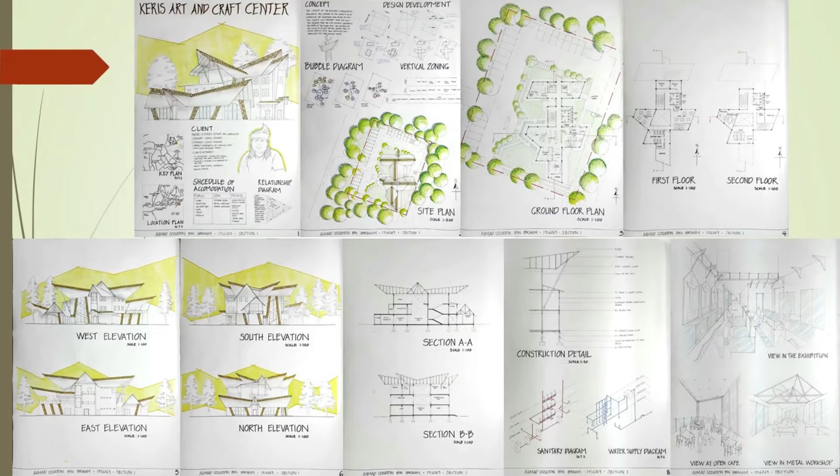In this video, I will present my design of an Art and Craft Center that was proposed specifically for Keris production. Let's start the presentation with a summary of the proposed site and the client for this project.

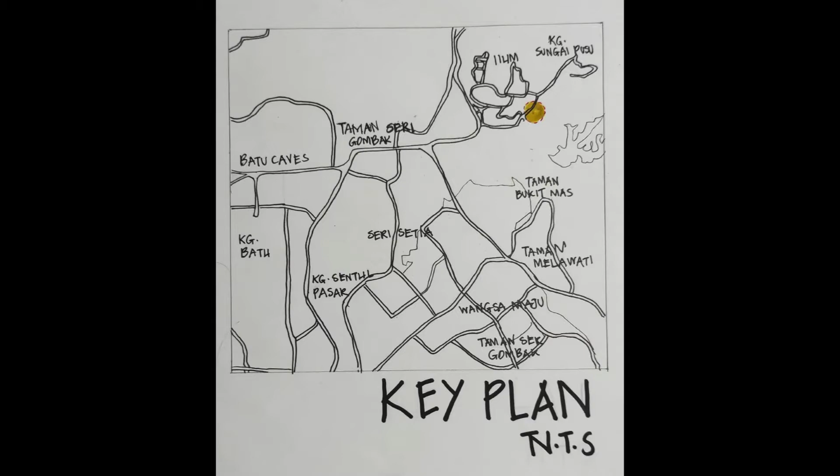My site is Site A, located near Mahallah Bilal, IIUM Gombak, Selangor. This is the key plan and location plan showing the location of the proposed site.

The client's name is Muhammad Izrin Izwan bin Kamaluddin, who works as an artisan specialized in making traditional Malay weapons such as keris, kerambit and golok. He currently works under a company named Keris Empire, based at Kampung Kota Lama, Kuala Kangsar, Perak.

Some of the synthesis obtained from the client: he wants two convenient and separate workshops, which are a timber workshop and a metal workshop, for producing the keris. He also wants 6 workers to be able to work at the workshop at one time.

He is also interested in Malay traditional elements in the building and the application of passive design, such as natural ventilation and lighting, especially in the workshop areas. He also loves to have modern technology to increase productivity, but he still wants traditional tools as he is used to the traditional way.

Next we move to the schedule of accommodation that was concluded from the brief precedent study, case study, and client synthesis. Generally, the spaces were divided into 3 parts: public, semi, and private.

In the public space, the areas included are the lobby, exhibition hall, souvenir shop, cafe, toilet, and musolla.

Meanwhile, the semi-public space includes the seminar room, metal workshop, and timber workshop. The semi-public space is open to public visitors, but they need some kind of permission to access it.

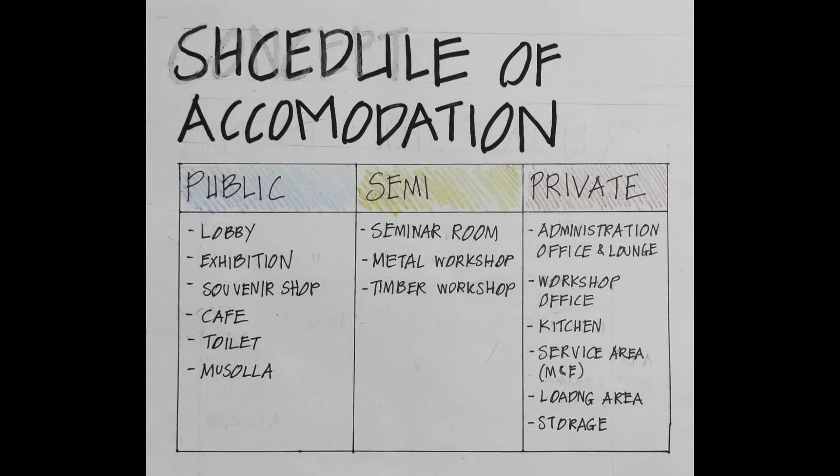Next we go to the concept of my building. As we know, keris is one of the most famous traditional Malay weapons for its sharpness and deadly strike. So as a way to represent and symbolize the sharpness and power of the keris, the concept of angularity is chosen to design the building. The angularity is also derived and influenced by the context of the site.

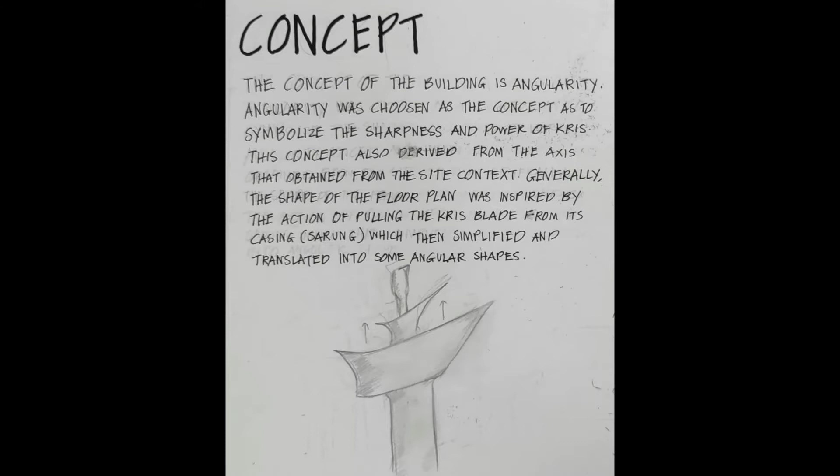Generally, the building floor plan symbolizes and represents the action of pulling the keris from its sarung, by translating and simplifying it into a combination of geometrical and angular shapes.

The design starts by making the view axis that connects all views from the site, which are the view of Mahallah Bilal at the west, and the view of the green and calm forest at the north, east, and south of the site. The second stage is making the wind axis that mainly comes from the north and west of the site.

The third stage is combining these two axes, which creates an angular axis that functions as the main grid line for designing and shaping the building.

The public, semi, and private spaces are positioned on the axis based on privacy level. The public space is located near the entrance to the site, while the semi and private spaces are located a bit farther from the entrance to give a sense of privacy.

The fourth stage is making simple rectangular shapes to represent these three main spaces. The public space is separated from the semi and private spaces.

Next, I play with the addition of shapes to indicate the entrance and maximize the view and wind amount into the building. The sixth stage is adjusting the shape to follow the angular grid lines in order to maximize wind amount into the building, especially at the north part, and also to maximize the view from inside the building directly towards the greeneries outside.

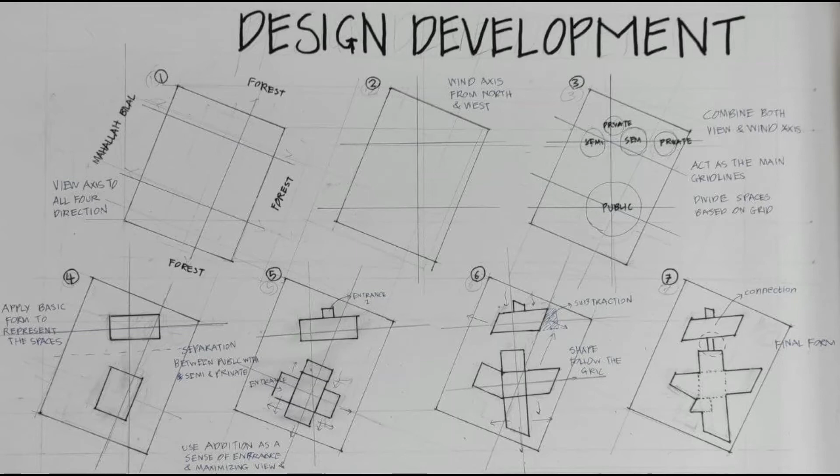Finally, an angular shape was obtained by following the angular side axis, and we can see that the plan assimilates and symbolizes the shape of a keris being pulled from its sarung.

After getting the overall shape, I started to organize the space within it. This is the bubble diagram for the ground floor. The blue circle indicates public space, yellow is semi-public space, and red is private space. The public space on the ground floor consists of the lobby, main exhibition area, special exhibition, souvenir shop, cafe and toilet, arranged close to each other.

Meanwhile, the semi-public spaces are the timber workshop and metal workshop, located at the north part of the site. This is to utilize and maximize the wind that mainly comes from the north as well as the west of the site. Another reason the workshops are separated and located a bit far from the public space is to give a sense of privacy to the workers, as well as to minimize the loud noise from the workshop being heard in the public space.

For the private space on the ground floor, it consists of exhibition storage, metal storage, timber storage, workshop office, service room and the loading area outside the building.

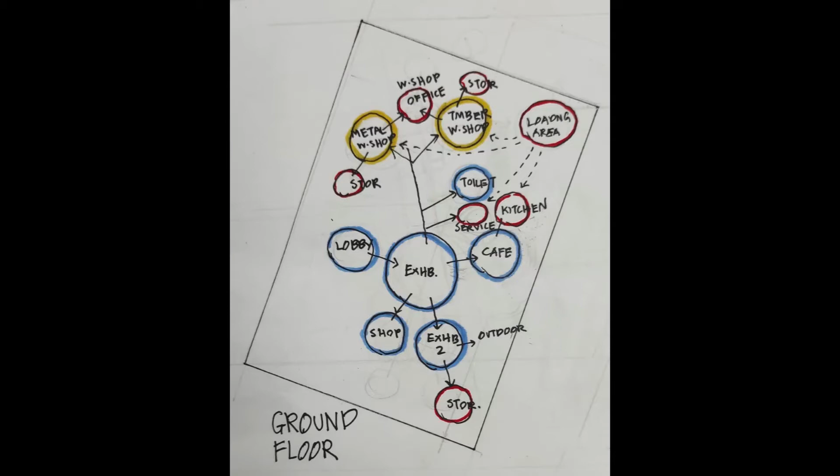This is the bubble diagram for the first floor. The public spaces available are the entertainment area, open cafe, toilet, musolla and outdoor rooftop. The semi-public space is the seminar room, and the private space is the service room. The central part is a void located on top of the main exhibition area on the ground floor.

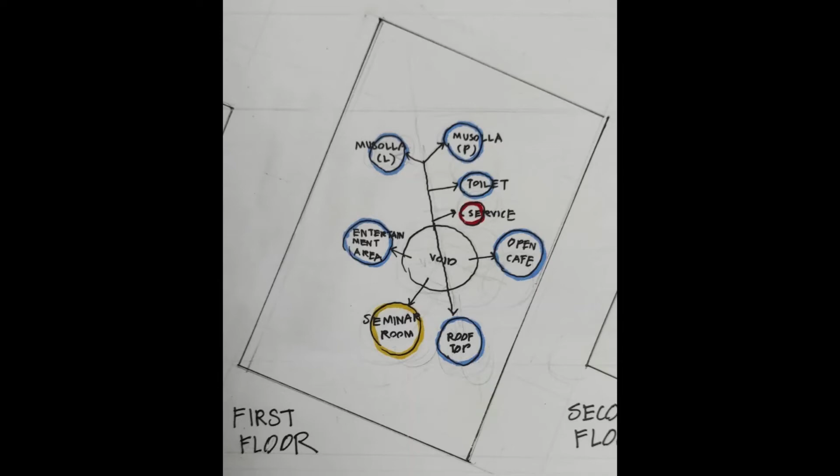For the second floor, all spaces are private, used for administration purposes and accessible only by staff. This space includes the boss room, meeting room, office, staff lounge, outdoor rooftop, toilet and also service area. The void is also located at the middle of the second floor.

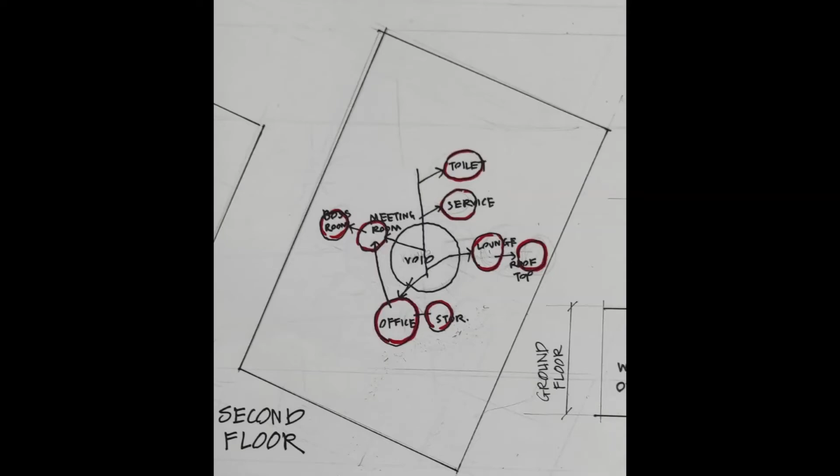This is the vertical zoning of the building. As we can see, above the exhibition area on the ground floor there are voids up until the second floor, in order to allow natural lighting from the skylight to reach the exhibition area. There are also spaces that are stacked up from the ground floor until the second floor, which are the toilets and also the service room.

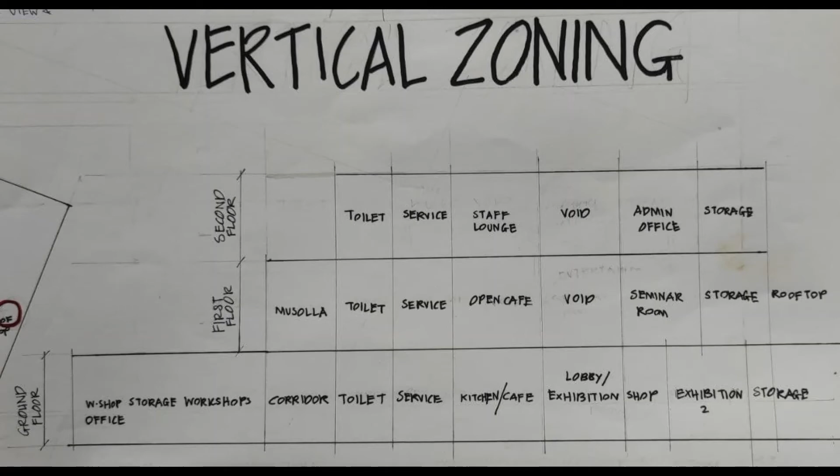This is the site plan. As we can see, the site is generally flat and surrounded by trees from all four directions. The blue arrow indicates the vehicle movement into the proposed site. From the main entrance of the site, the visitor can go to the drop-off in front of the building and then find parking for their car.

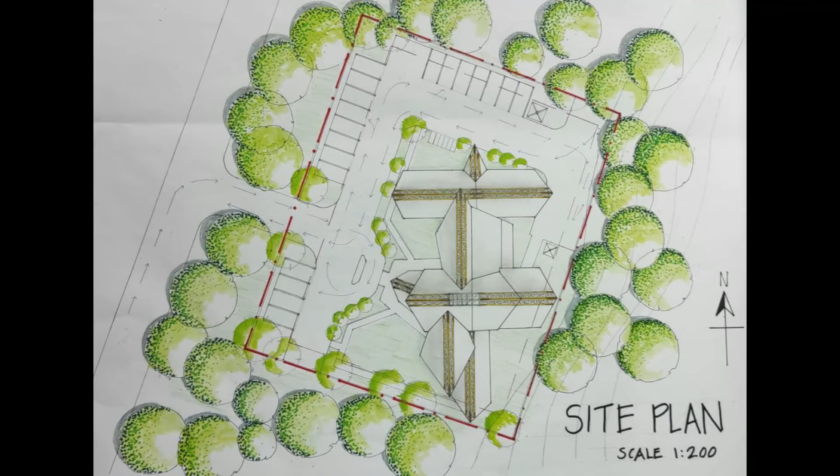All the parking lots at the west of the site are provided for public visitors. Meanwhile, the parking lot at the north is only for staff use. The loading area is located at the northeast of the site, near the workshops and kitchen areas.

Then we go to the ground floor plan. At the ground floor, the visitor will enter the building from the main lobby. A reception desk is provided at the lobby to welcome the visitor. Then from the lobby, the visitor can enter the heart of the building, which is the main exhibition area.

In the exhibition area, many kinds of kris and other Malay traditional weapons are displayed, and most of them are kept in glass boxes. Visitors can also go to the outdoor platform or special exhibition area at the lower part of the ground floor. The souvenir shop is also located near the entrance to attract visitors to buy souvenirs, either when they first enter the building or when they want to return home.

The cafe at the right side of the building is mainly a preparation area but is still provided with a few dinner tables. The main cafe is on top of it, on the first floor. The workshops are located at the upper part of the ground floor and are connected with the public space through a corridor. At the workshop there is also a private entrance that can only be used by staff or workshop workers.

The workshop office is located between both the metal workshop and timber workshop, to ease the workers in monitoring both workshops as well as to give them a place to rest. Storage is also provided in both workshops.

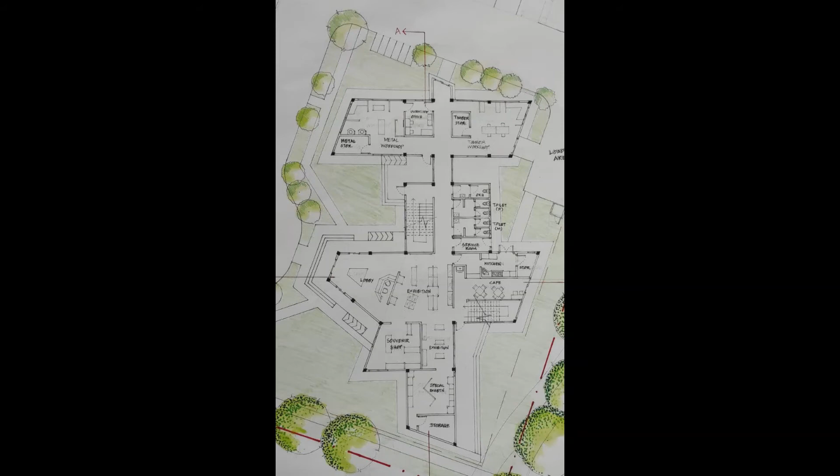The loading area is located near the workshop and kitchen. Pathways were provided to ease the delivery of goods into this space.

Next, we go to the first floor plan. From the stairs, the visitor can go to the open cafe which faces toward the calm green forest at the east part of the building. The void in the middle of the first floor allows visitors to view the scenery of the main exhibition area at the bottom.

At the left side of the first floor, there is a seminar room and an entertainment area, both accessed through a cantilevered corridor. In the entertainment area, visitors can experience activities related to kris making, such as carving on the hulu kris and designing the pattern of the kris blade.

The rooftop at the lowest part of the first floor is for visitors to relax and enjoy views of the outdoor scenery. A musalla is also provided for Muslim visitors to pray.

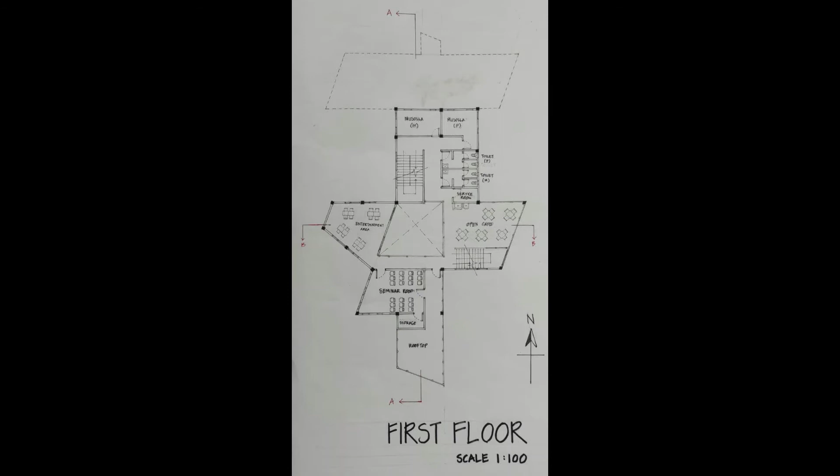Next, we move to the second floor, which is a private floor, basically for the administration and office staff to do their work. This floor is provided with the boss room, meeting room, office, storage, lounge for staff to rest, toilet, and also a service room.

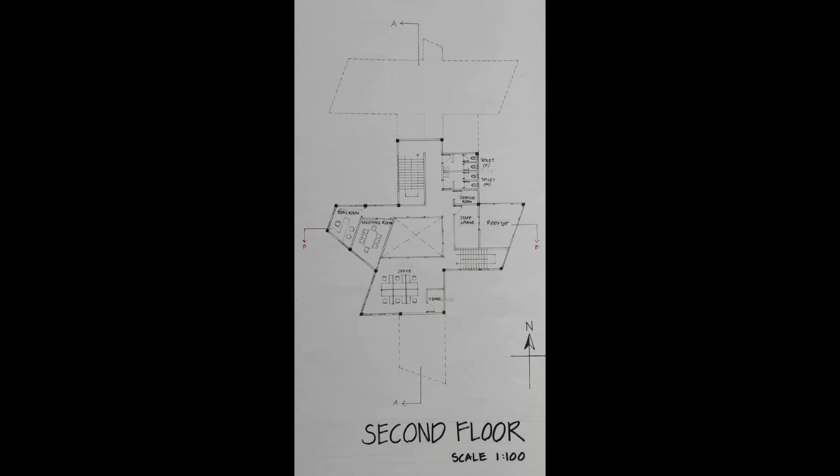The rooftop next to the staff lounge allows the staff to experience an indoor-to-outdoor relaxing moment. The void in the middle allows the staff to see the view of the ground floor exhibition area.

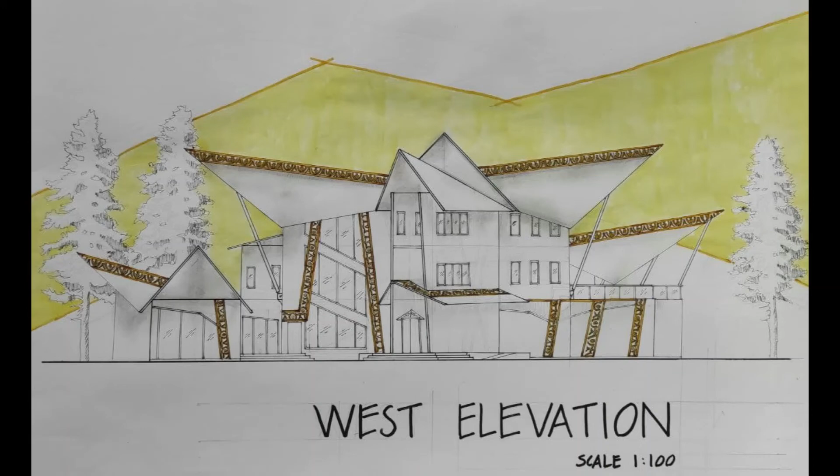This is the west elevation of the building, which faces toward the building entrance. The facade uses wood carving panels with patterns found in kris blade designs, applied at some parts of the wall and at every ridge of the roof. Angular and sharp roofs with big overhangs are used to symbolize the sharpness of the kris in a modern way.

The same design approach applies to the east elevation, south elevation, and north elevation of the building.

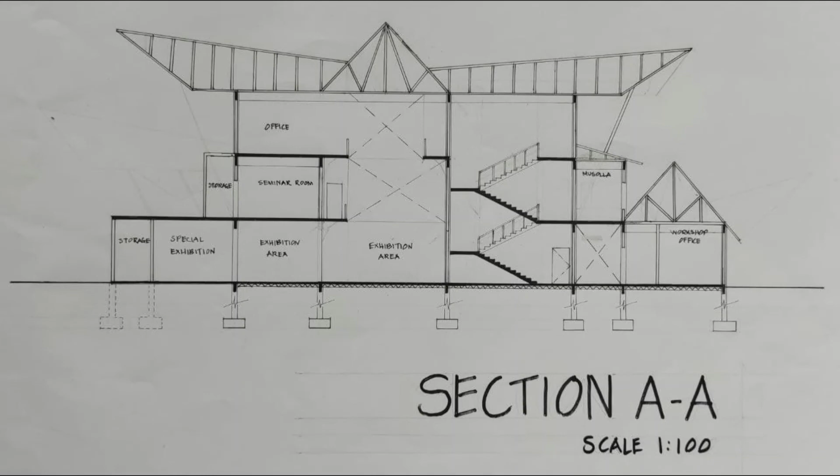Next is section A-A of the building, also showing the stacked void, the rooftop open cafe on the first floor, and the rooftop next to the staff lounge on the second floor.

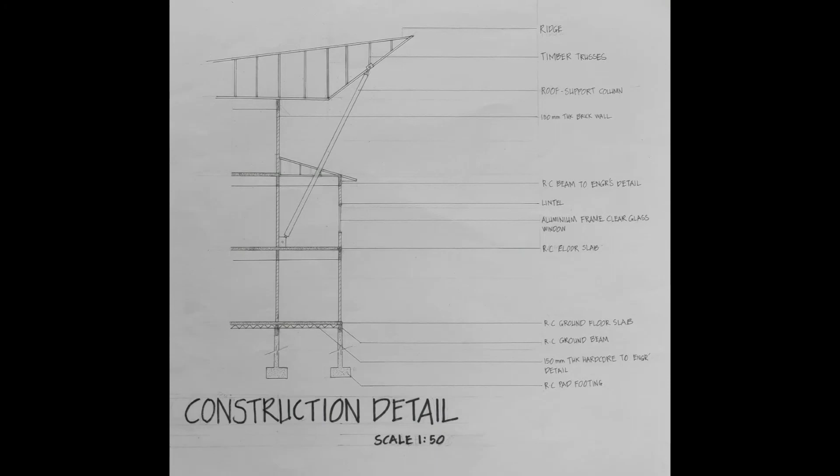Then we go to the construction details. This building uses a concrete post and beam construction system. The type of footing used is concrete pad footing. Here we can also see the use of roof support columns to support the large overhang of the roof.